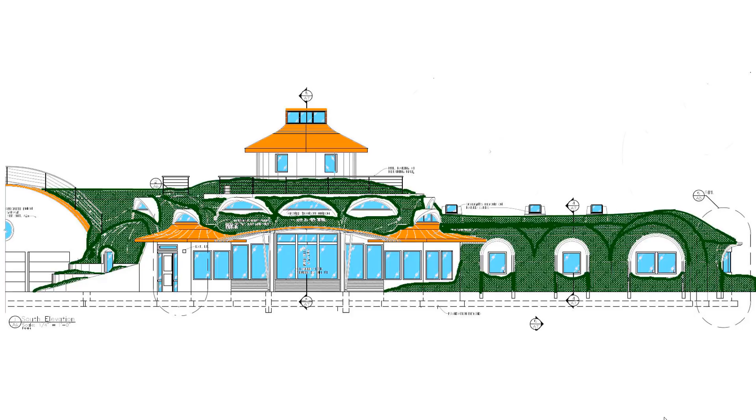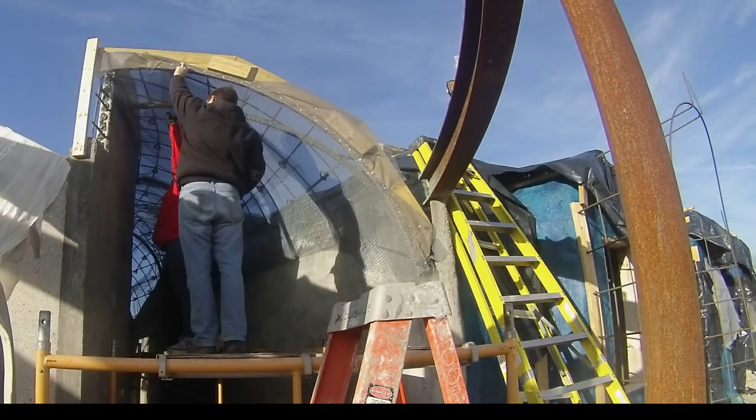In this episode, we're still prepping for the Shotcrete crew. Back when we shot concrete for the bedrooms, we had to save some bits for later. For instance, this hallway section had to wait until the perimeter walls of the circle were done so it would have something to attach to. The half vault shape came from the same steel arches used to form the bedrooms.

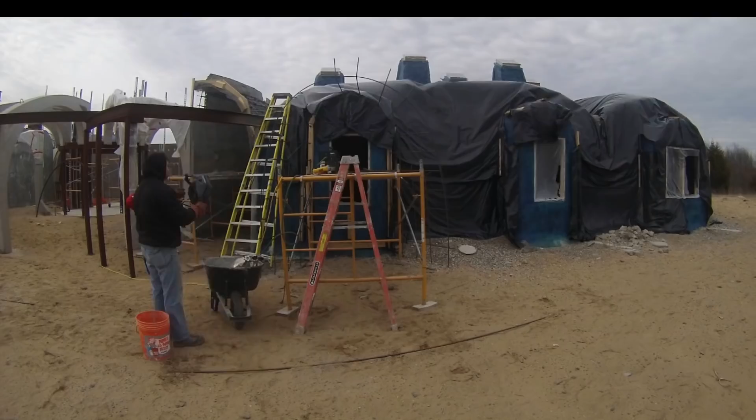Then we set up a rebar framework, but it wouldn't catch all the shotcrete by itself. The lath keeps that shotcrete from just blowing through. Then we, and by we I mean mostly Sherry, pushed pieces of wire through to tie the lath to the rebar every 6 inches. Further over on the bedroom side of things, I'm basically putting up rebar, mostly freehand.

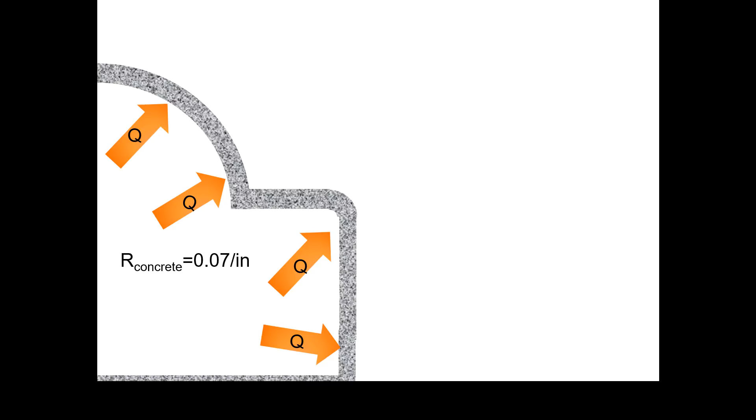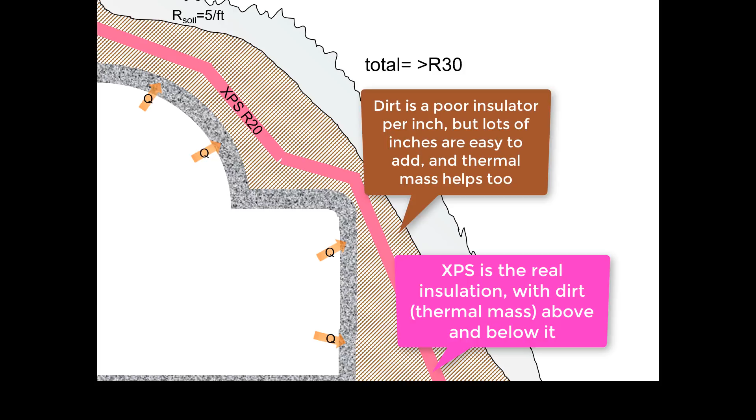This structure is made of concrete which has a pretty poor R value of about 0.07 per inch of thickness, or about 18 times worse than plywood or 70 times worse than insulation. The buried parts of the structure will be well insulated with extruded polystyrene, but these structures I'm prepping now will stick out of the earth so I can't have them thermally connected to the rest of the building, or they'll act like radiator fins and quickly drain the building's thermal potential.

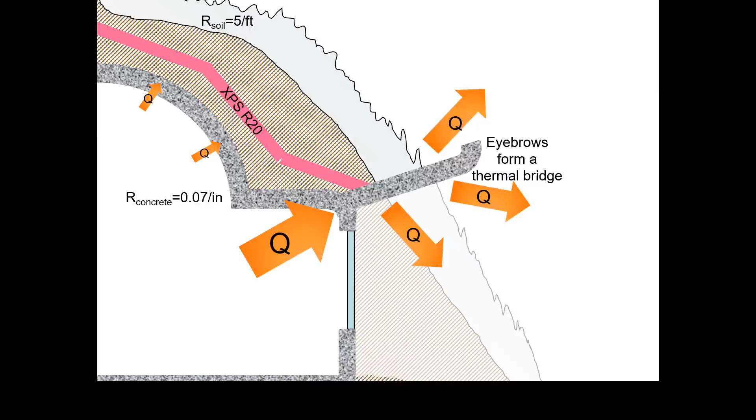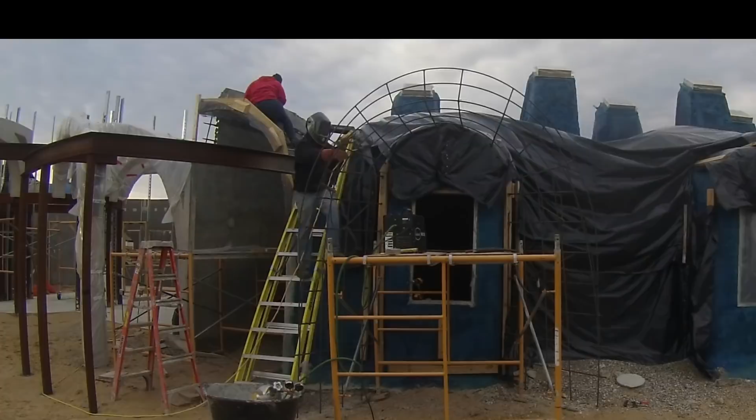Instead, my plan is to cover the dormers with a 4-inch saddle of insulation and then build the concrete eyebrows outside of the thermal envelope. I started by attaching treated wood to the structure and then placing rebar into holes drilled in the treated wood. This is a compromise. The thermal performance would be improved if the eyebrows were just completely isolated and freestanding. But using those small screws to attach the wood directly to the building greatly simplified the build.

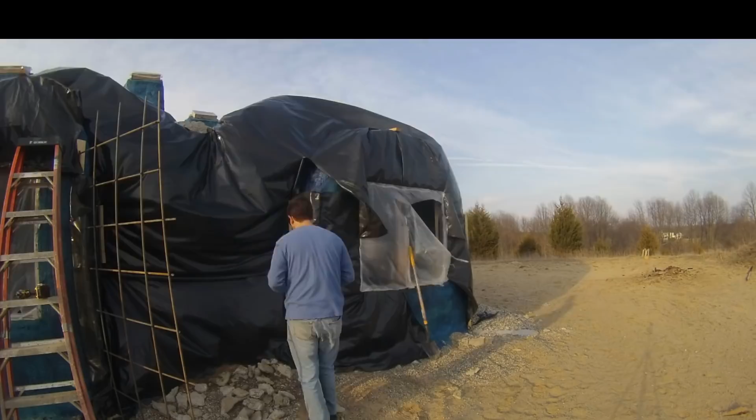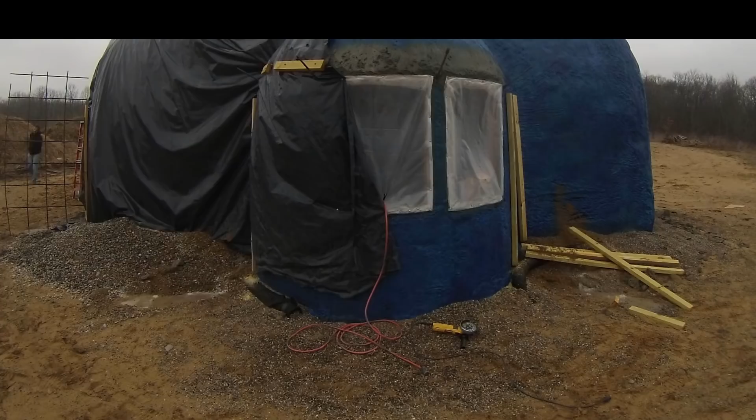From there, I just freeformed rebar to create the sort of earth-retaining shapes that I wanted. Of course, there were some measurements taken to have the right overhang to keep out the summer sun, and side flare had to be wide enough to have the views that we wanted. And I used a level to make sure that things that needed to be plumb were plumb, but mostly it was freehand. These little side fences were just a nice simple way to form the vertical parts, and then I added the arched parts after that.

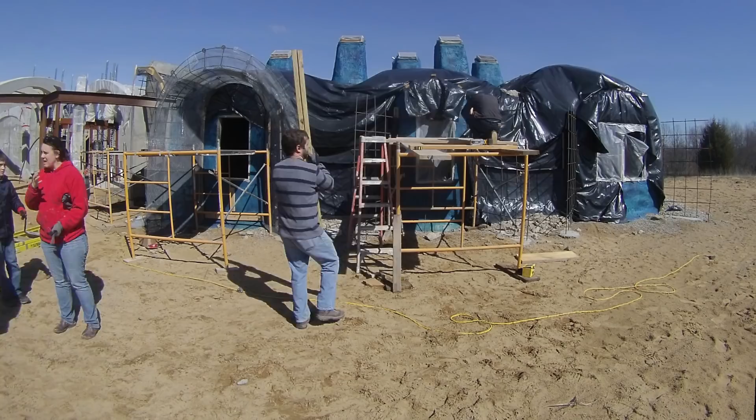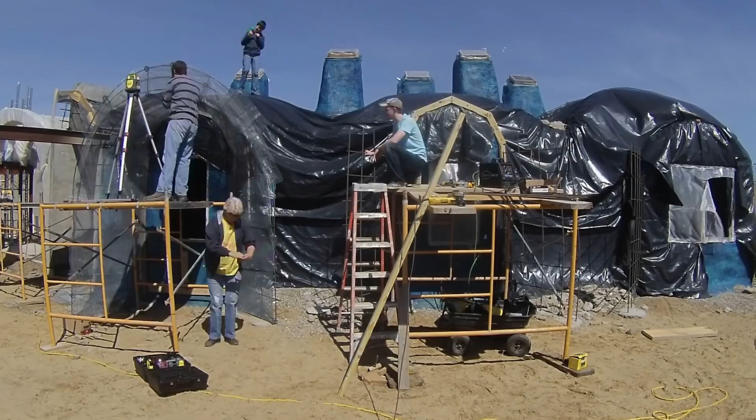The black plastic flapping in the background was really just for keeping the sunlight off the Blue Max waterproofing, but I figured it wouldn't hurt to leave it on as an extra layer. We tried to use the laser level to match the heights of the eyebrows, but everything was too freehand for that to work too precisely, especially since we expected some unpredictable deformation once the concrete load was added.

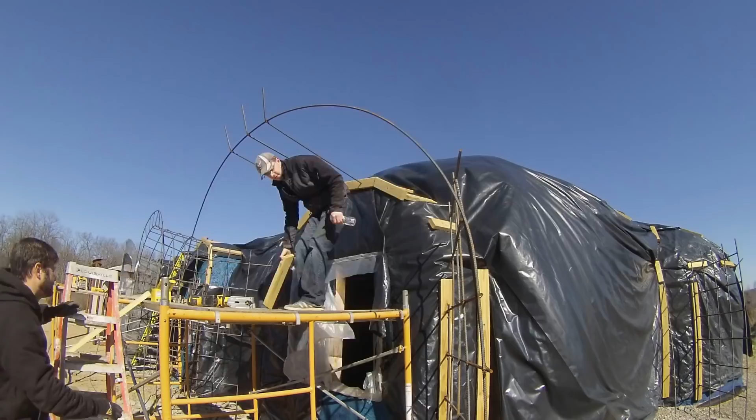This closer view gives you a better shot of the wood blocks that held the rebar in the right locations without needing to actually drill it into the concrete.

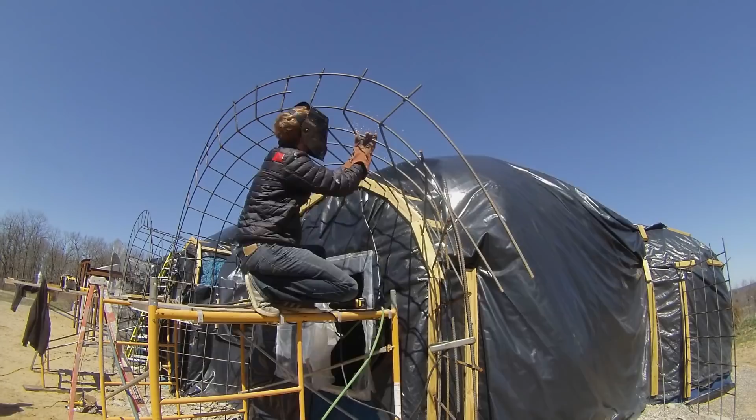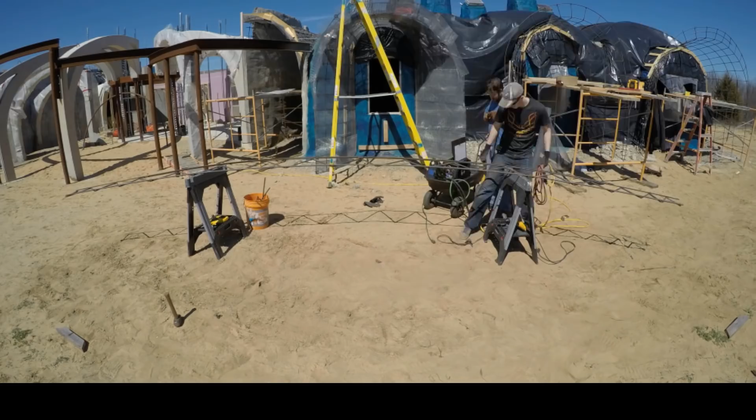The rebar gets a bit floppy over longer lengths, so I decided to build a 2D truss for the wide span across the last eyebrow. We basically laid out rebar on the sand and welded a truss together. We made it symmetrical so it would curve evenly, and of course, because it's a 2D truss, it can only curve in the one direction, so it won't sag when we put it up in place.

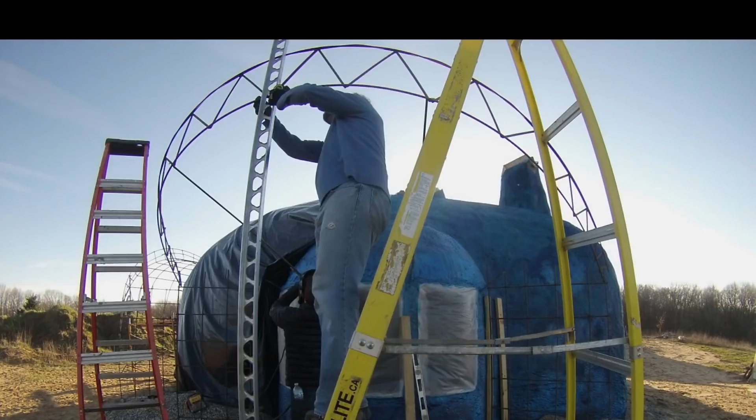My initial attempt used the idea of a 3-4-5 triangle to mount the curved truss to the structure, but it ended up looking like a big sombrero. So, not on video, but we ended up cutting this down and putting up a less protruding version that you can see in the next shot. This is all freehand, so I had a wide range of possibilities, but I ended up deciding to make it look a bit scalloped. This allowed for maximum structural strength against the soil load with minimal light obstruction across the 3 windows.

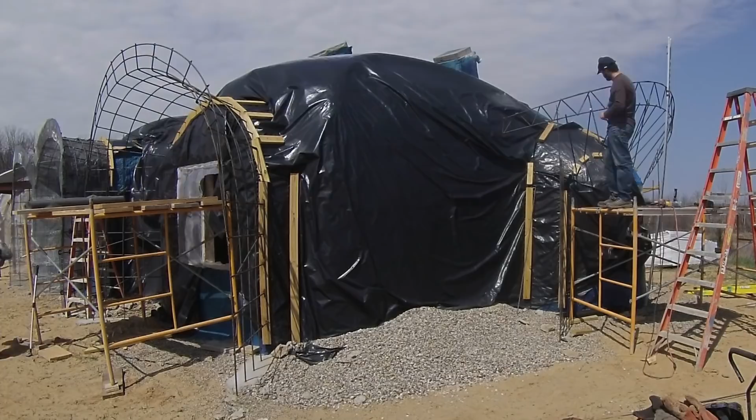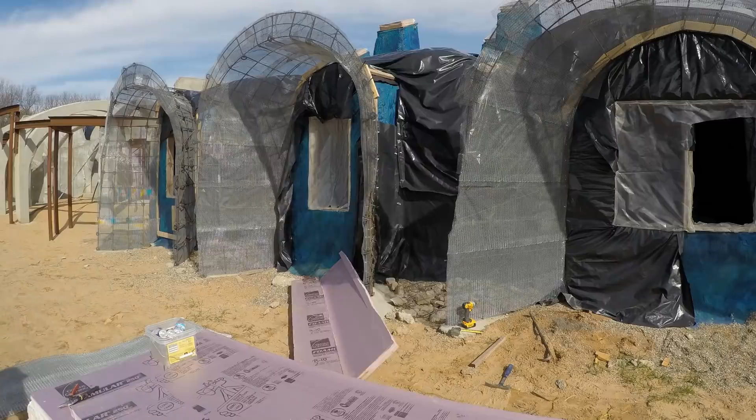Back here to the south side, and it's time to put up the insulation saddle. 4 inches of Foamular 250 XPS, covered in lath and screwed into wood furring strips that were separately and sparsely attached to the concrete.

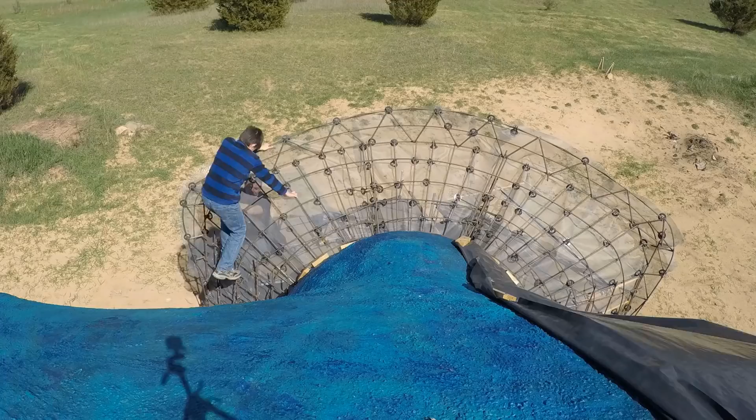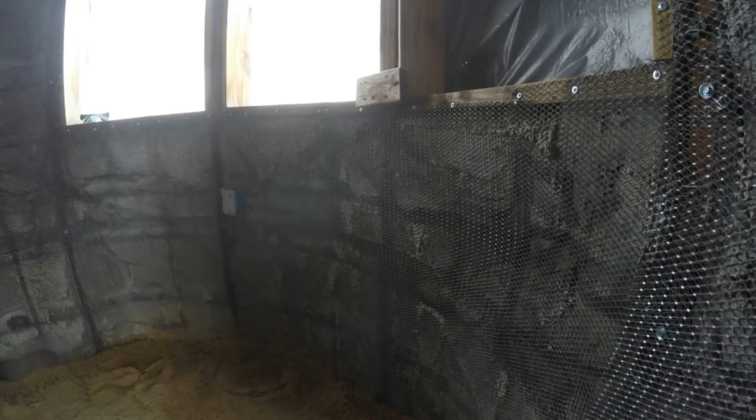Meanwhile, over here on the bedroom apse, you can see Sherry and one of the boys tying up the lath. A very tedious process. In this clip, I am pushing hydraulic cement into the gaps and cracks around the window bucks on the inside to keep the water from coming through later.

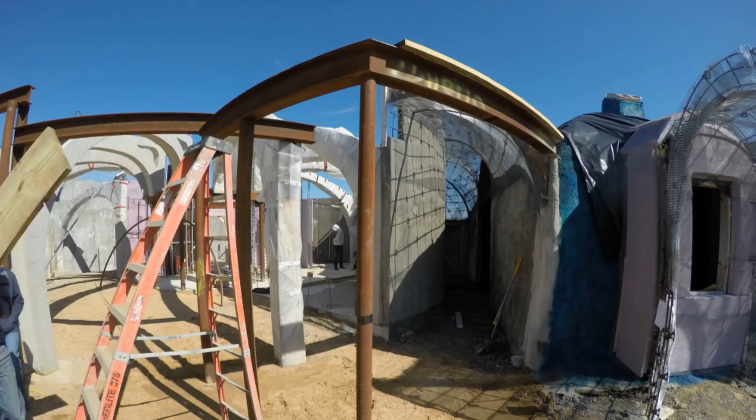We also decided to form up the greenhouse walls. We are trying yet another new style of construction. In this case, the steel forms the skeleton, and then we bolt the 2x12 boards to the top of the steel for easy attachment of other things later. We then form a curtain wall with steel studs. Here I'm welding up brackets to attach those to the I-beam.

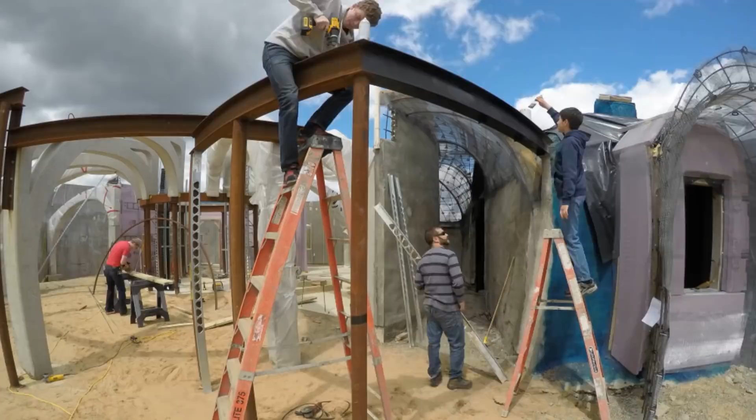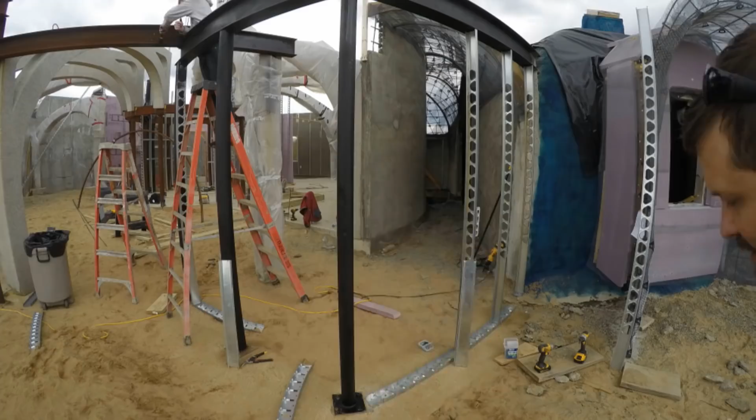The studs are just hanging for now, but eventually we put in a floor track to secure the bottom edge to the footing. The window bucks are also cut to curve to match the I-beams and the footing track. Then we skin the wall with 2 inches of rigid insulation covered with lath.

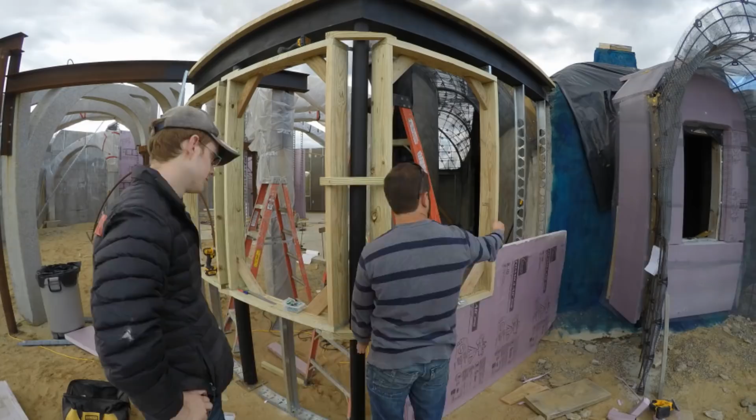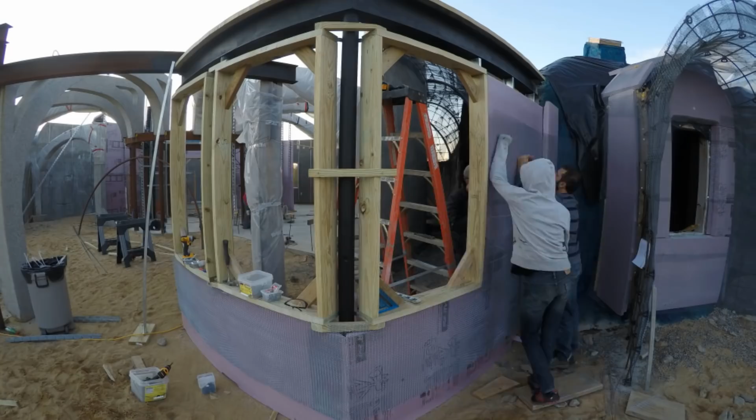Later we come back and add 1 inch of shotcrete or stucco to the outside of this. And then we can come back later to fill the wall between the studs with sprayed-in insulation to bring it up to R30. We added more studs on the inside just to give us more attachment points for the lath, and screws are placed every 8 inches.

Back to the bedrooms, and you can see how we attach the 4 inches of XPS. The first layer is a mosaic of XPS and wood furring strips. It's a lot easier to lay it out together like this, rather than placing the furring strips first, and then risking that you will need to trim the XPS to fit. The red tape is just there to keep the pieces from blowing away while we puzzled it out.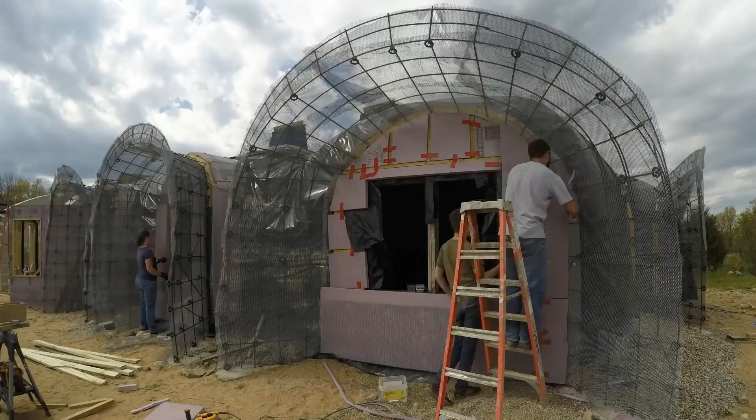After getting the first layer in place, we can add the second right over the top of it and secure it all with screws through the lath and into those furring strips. These walls end up at roughly R20, but since the rest of the rooms will have a much higher R value and there will be zero infiltration and lots of thermal storage, I think it's an acceptable compromise.

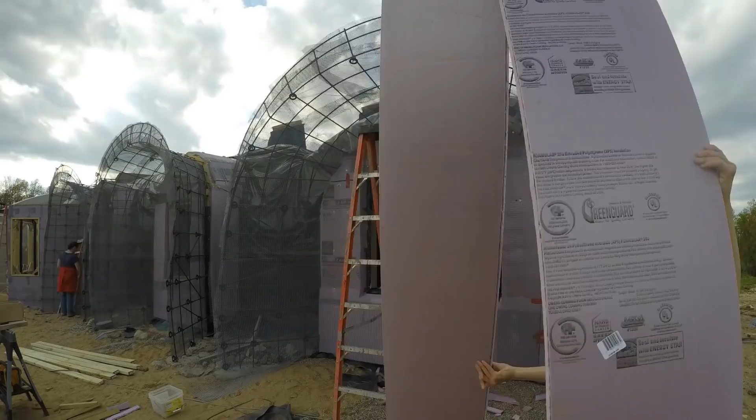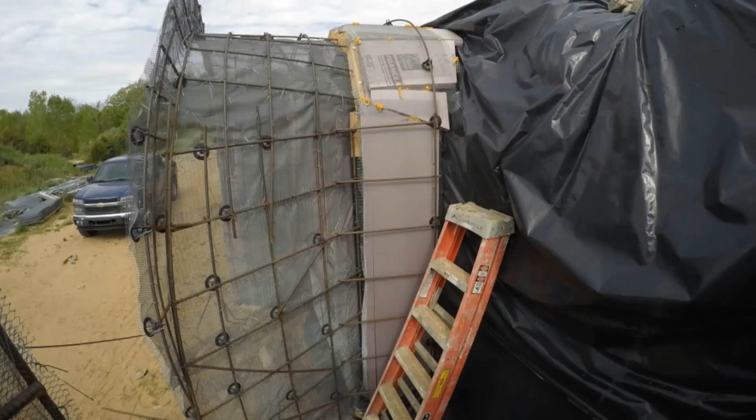Here on the master bedroom apse, things are a bit more challenging because of all the curvature. Meanwhile, we're adding rebar over the insulation saddle on the other dormers. Again, a little tack welding, this time by my sister, goes a long way toward making this assembly much stiffer. And yes, you can weld rebar, you just need to follow the rules.

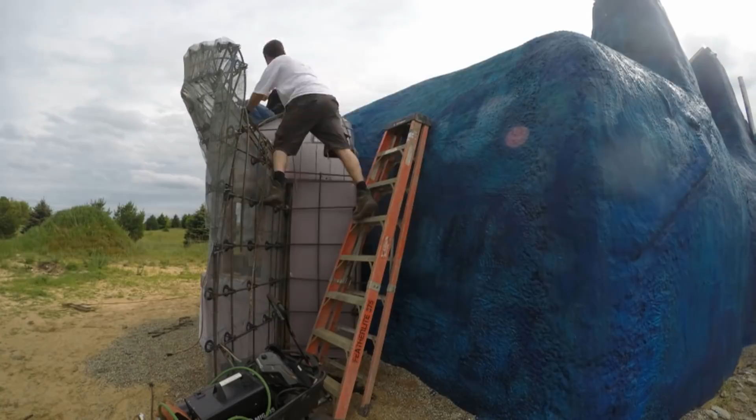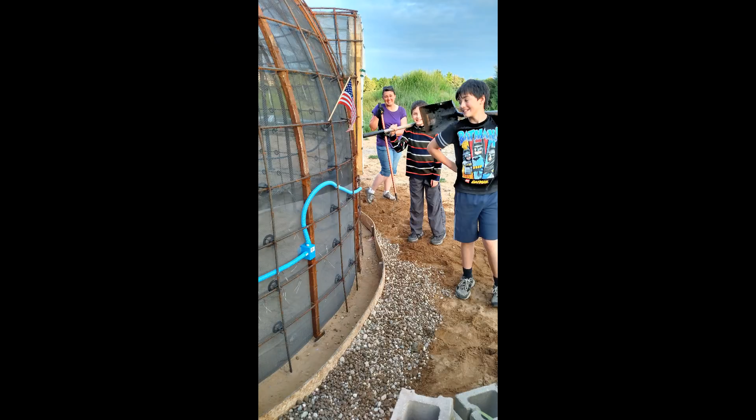With these last bits of rebar in place, we are ready for the shotcrete crew. We decided to do a few things differently this time, such as putting in the drain tile, it's under the gravel in this picture already, before the shotcrete crew so we wouldn't have to dig our way through the mess later. No real footage of that survived a data loss event, so here's another pic.

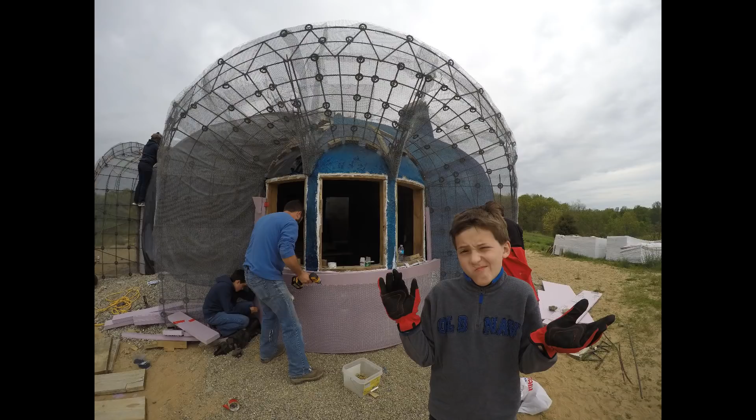For some reason this time we also had an epidemic of people posing for the time-lapse camera. In case those went by too quickly in the video, here are some stills. Sure, son, I can handle this board all by myself while you pose. Michael made a whole series of faces, and yet all very similar, and my favorite.

Next, we'll get the shotcrete crew out here, or maybe gunite.